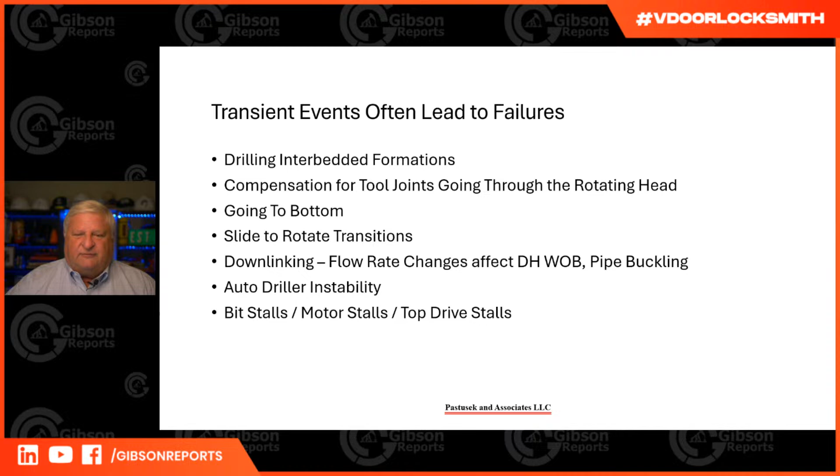So why do I care? Well, I need high weight. If I run high weight in the soft formation, I'll get high penetration per revolution. But then when I transition to the hard rock, I'm taking a very big, deep depth of cut, and I will break those cutters on the nose.

So if I run low weight in the soft formation, that's great—it slows down. But then when I get to the hard rock, the bit slows down even more, and I go into reverse whirl, because reverse whirl at the drill bit is a function of penetration per revolution. So that's not good. I don't like the first one because I break the cutters, and I don't like the second one because I start to vibrate.

So if I run high weight on bit in the hard formation and then drill off into the soft, I overload the cutters on either side of the nose. We'll show that here in a second.

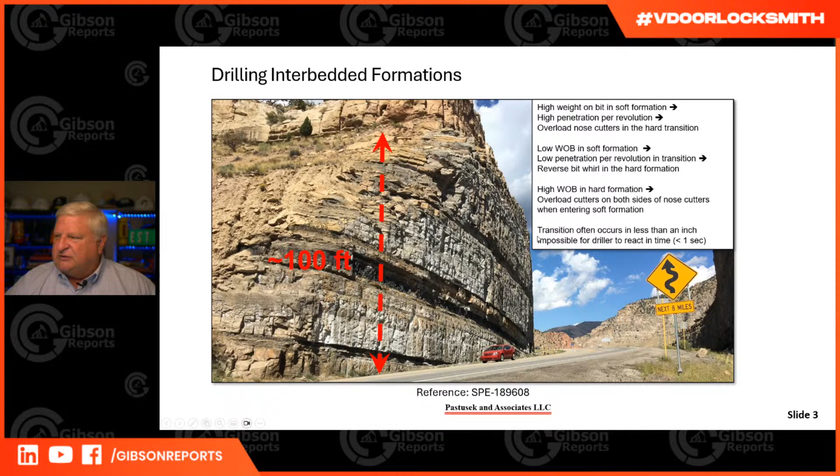So first off, you have to understand the problem. There's been a couple of papers—I put references down here for several SPE papers that you might want to read for follow-up.

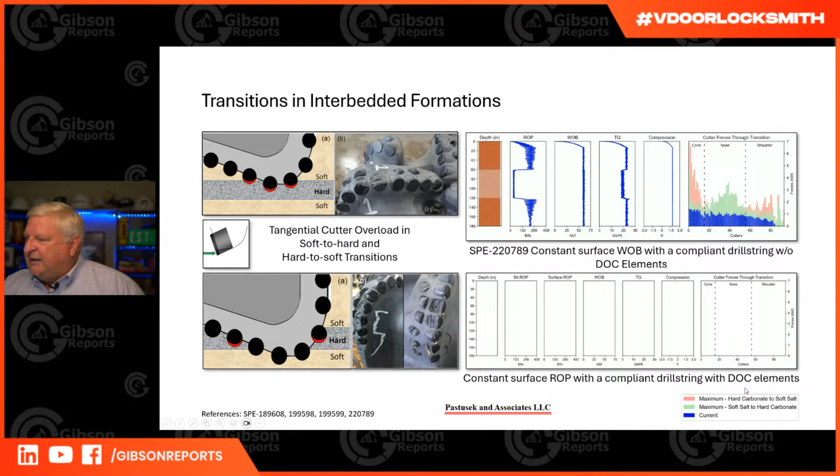What I'm going to do is, instead of running a constant weight on bit, I'm going to run a constant surface ROP. I still have a compliant drill string, so there is some string stretch that will change, and that makes it more difficult. In fact, what we're going to do is add depth of cut elements to the drill bit. We're going to put features on the drill bit to limit the maximum depth, because if it drills into hard rock... we'll go ahead and start this thing up.

Okay, so here we are. We're drilling along, and we're going to drill at a controlled ROP right here. Okay, you can see this ROP is slower than the other. That's important. I'm trying to control the ROP just when I need to, but I'm going to do so so that it doesn't overload those nose cutters.

Okay, so here are the loads. You see the load per cutter is quite low. Looks pretty good.

We're going to drill into our transition into the hard rock. Oh, look at there - that was the transition right there. Very little change. We didn't have this huge peak right here, right? Because we didn't approach it at a very high depth of cut.

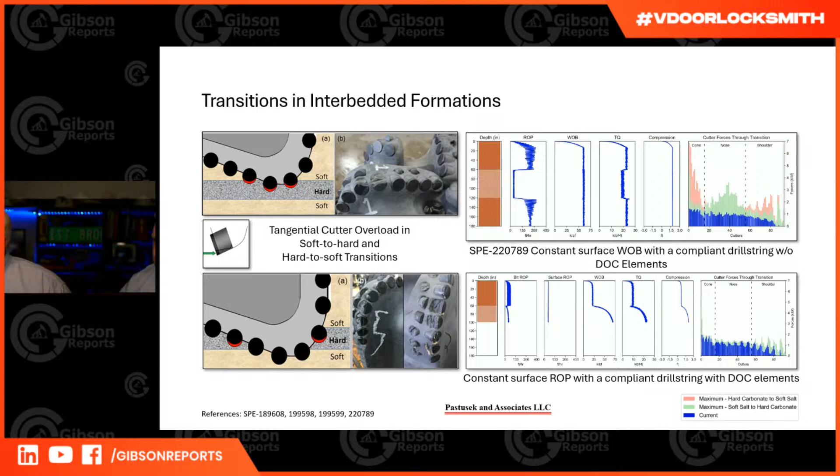Now, by the way, the other analogy that I like to use here is dipping a chip into your guacamole. I love guacamole. So guacamole is hard - it's hard enough to exceed the structural limits of the chips. You dip a chip in there, and you want to go maximum guacamole per chip right up to the structural limit. Same thing - we want the maximum penetration per revolution right up to the structural limit.

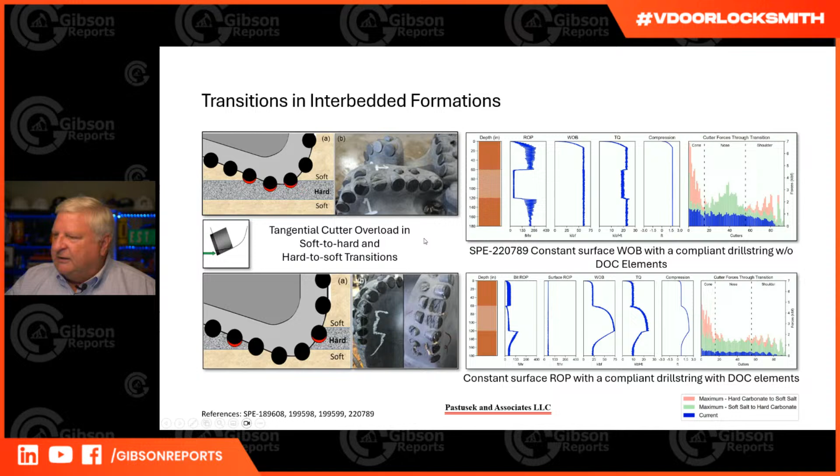But you can see here by running in ROP mode, I limit the overshoot of those little transient events right here by putting depth of cut elements on. So if you read the paper, you'll see there's every case with and without a compliant drill string, and with and without depth of cut elements. So it's a pretty complete paper, and well worth reading if you take a look.

Okay, transients - that's one again. You did have these two questions that didn't come up already. What about optimized ROP in a safe environment for the BHA?

So what you have to decide in terms of the best ROP to run depends on how hard the hardest streak is. Think about it: the soft stuff doesn't hurt anything. I don't have to worry about drilling through 5,000 to 7,000 psi. It's when I drill into a hard streak. If it's a 15,000 psi hard streak, I can take a bigger depth of cut, bigger penetration per revolution, than if it's 20,000 or 30,000. So I need to know something about those rocks.

Sometimes I don't actually have their strength. In unconventionals here in the US, we don't do logs for a lot of stuff. But then again, we've drilled 100,000 wells, so we actually have a pretty good idea where the hard streaks are.

What you have to look at is that hard streak: how hard is it, and did I break the bit last time? If I did, I'm going to back off the ROP when I enter. That's the deal. If I break the nose, I back off on the ROP when I enter. If I break down the outside, I back off on the ROP as I'm exiting.

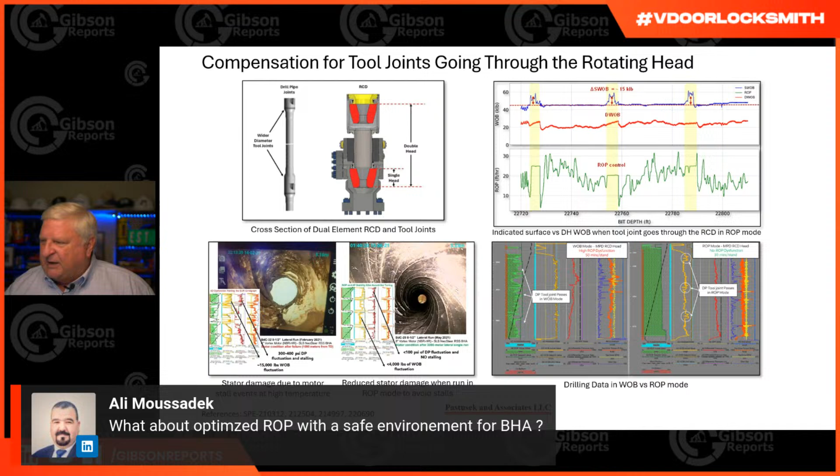Okay, what was the other question? It was just kind of a comment, about setting up real-time auto-detected founder point.

Oh yeah, so there's a lot to be said for what I'll call roadmaps. With roadmaps you do this work and say, here's my hard sections, here's the intervals of interest, and I need to set up a roadmap so I know what's coming. You can't do it like going down a mountain road—you can't get into the curve and then hit the brakes. You've got to hit the brakes a little ahead and anticipate that.

So that's what roadmaps are really good for, so you can figure out what your drill bit is capable of. All right, what was the last comment again? MSE real time with downhole parameters—it can.

If you've got downhole MSE, absolutely you can pick up a lot of this stuff. If you've got downhole MSE, you also have downhole torque and downhole weight, and you'll see those peak events. What I'll tell you is, I've got data with an in-bit sub showing that the peak torque at the drill bit goes up a little bit, but not by a factor of 3 or 7 like you'd see on surface, because I'm only loading one or two cutters. That's the value of doing the modeling—it gives you better insight into what's really getting exceeded when we exceed that structural limit.

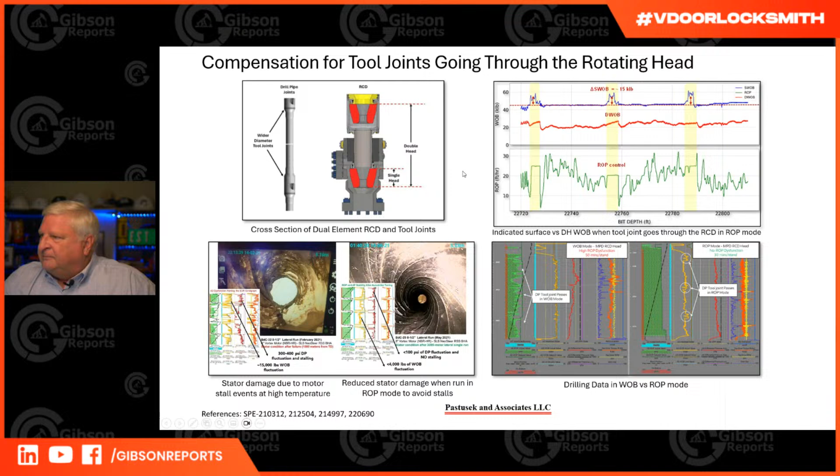If you look a little further - this is one of the more recent papers, 214997. What you see here is the tool joints indicated in blue, each one of these graphs. What I really want to point out is this is lateral vibration at the drill bit - a memory tool in the drill bit. And guess what you see? I hit a tool joint, and when I hit the tool joint, I get an increase in lateral vibration. In fact, watch this one - this tool joint right here, I more than doubled the vibration at the bit.

That's whirl, okay? Same thing - look at this tool joint right here, I more than doubled the vibration, and it's persistent. The tool joint only lasted a few seconds, but the vibration has a hysteresis to it. You start creating whirl, it stays in whirl, and it stays in whirl until you pull the bit. So from a bit whirl standpoint, again, I don't see this at the surface. I don't know whether it's whirling or not. I may, and I certainly don't understand it unless I look at this 1 second or faster data.

This is a similar deal with stick slip - this is RPM at the drill bit, and you see more stick slip, more stick slip, more stick slip, and here's the zoomed in version of that. What you see happening is that I've got those transitions - I'm adding or taking away 5,000 or 10,000 pounds of weight on bit, and then I add it all back in a square wave. So that's just exciting my stick slip, and I do that 3 times a stand.

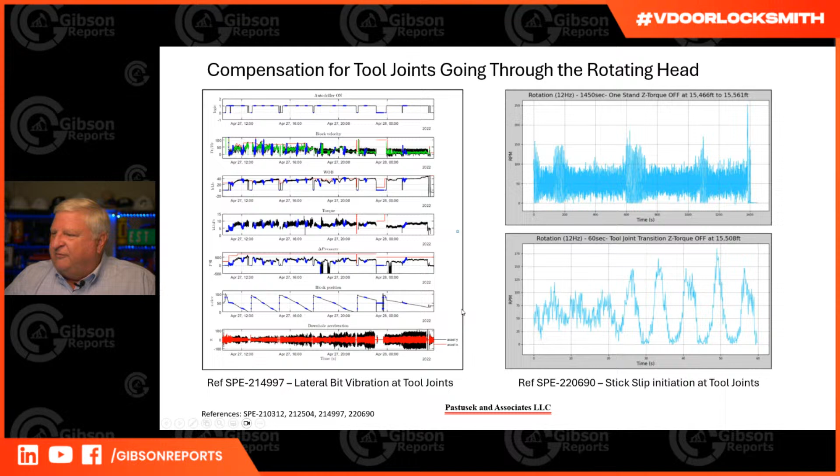So is this a problem for you or not? The only way I can tell you is go look at your 1 second data or faster. This downhole data was phenomenally insightful to understand what was going on, not just downhole, because this lateral vibration, we'd never pick it up at the surface. Even in the MWD tools, which might be 50 or 100 feet away, you may not see what was going on at the drill bit.

All right, I thought you were going to say this is a problem if you have tool joints. If you have tool joints, it is. If you have rotating heads, it is. If you don't have both of them, you're probably okay.

It just seems to be less of a problem. If you're drilling 200 or 300 foot an hour, it doesn't seem to be as bad the faster you go. I think you just got enough inertia, you just go right on through. But would that be the potential of having like an RCD that's kind of worn out?

Oh, you definitely see that. When I put a brand new RCD in, I've seen as much as 20,000 pounds to squirt the first one through, and then over time it gets to 10,000, and then it gets down to 7,000 and 5,000 because it wears out, obviously.

So how tight is the rubber element? And this is even without back pressure. If you add back pressure, if you're actually doing MPD, that's going to add additional loads because the tool joints are bigger, so there's more contact area around it.

So is that another way to tell if your RCD is going? You can, yeah, absolutely, you can tell it's wearing out. You can see the change in that step, and then you won't see that step anymore. It'll just be a drop off in ROP, unless you're running an ROP mode. If you're running ROP constant, then the weight on bit will go up, but it'll go up a little bit less.

So it could become a very good diagnostic.

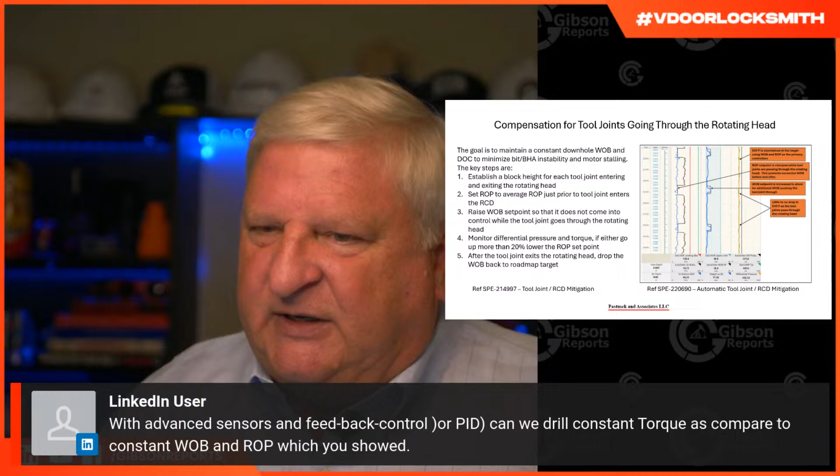Sorry, let's see, there was this one here. If a PDM is in the BHA, the differential pressure will tell.

Yes, absolutely. The differential pressure is a really good indicator of torque, without a doubt, and again, weight on bit as well. So the only thing about running in differential pressure mode, if I'm trying to do a PID control loop like the auto driller in differential pressure, the time delay on the signal is about 20 or 30 seconds. So differential pressure goes up downhole, 20 or 30 seconds later I see it at the surface, and then I respond to it. And by the time I respond to it, I'm already back into the next thing.

So it's very difficult to get an auto driller to be stable. No control system likes delays in the feedback. And the ROP has essentially zero delay. ROP is just drum speed. So, if I command it to do 120 feet an hour, the drum will rotate at some RPM to give you that exactly.

And it's millisecond kind of delay. So that's very stable. Weight on bit, it's a 5 or 10 second delay. Differential pressure is a 30-second delay. You know that when you turn the pumps on and flow comes straight up, it can take 20 or 30 seconds for the differential pressure to stabilize. So it's very difficult to control on those others. I use them more as a safety limit.

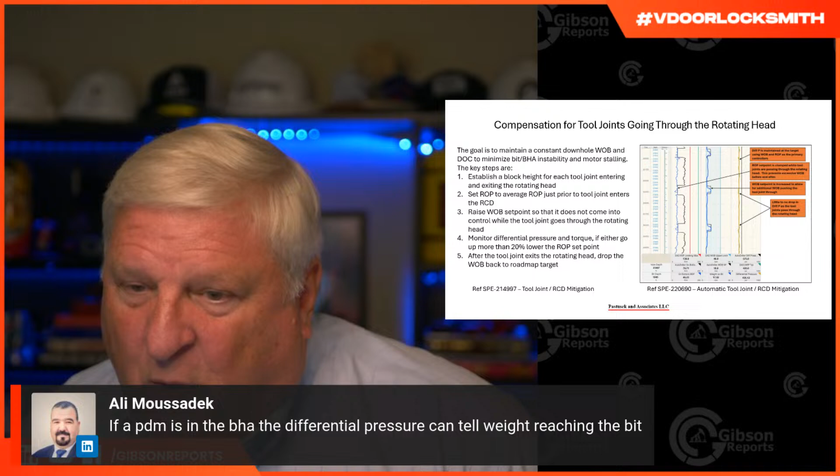Spring-loaded sub. There's all kinds of compliant elements in the BHA, and I used to think those would be great. Careful, I think you need to model that and see. The reason I say be careful: if I add extra compliance, and I'm in hard rock drilling at 60,000 pounds weight, and it drills off into soft rock, if I put a spring element there, when it drills off, the bit's going to squirt forward, and I'm going to overload those cutters even more.

So compliance, if you look at the paper I mentioned on modeling cutter loads, we modeled it without any drill string compliance. And man, in ROP mode it is beautiful, really, really good. Which is why the hint is that what I want to do is make the ROP of the drill bit close to constant. That's what depth of cut elements do for you, they keep you from exceeding those peaks.

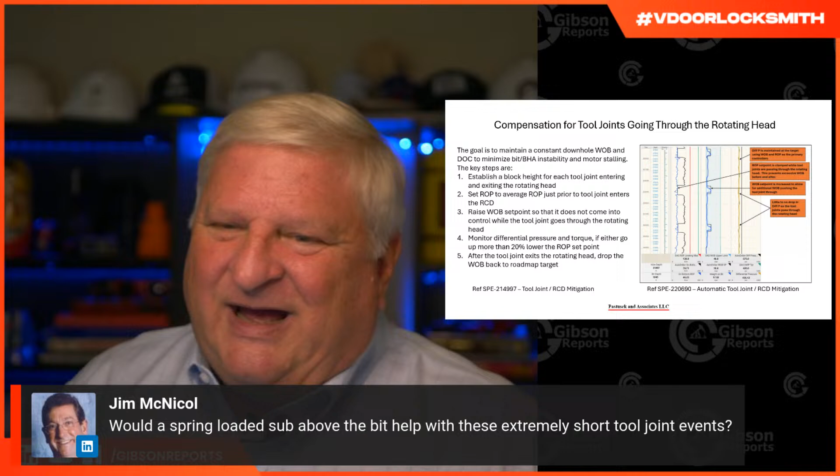No variations from tool joints when drilling with a Kelly and a rotary table. Robert, you probably remember when we ran rotary tables and Kellys, don't you? Yeah, that's true, those things. We weren't running RCDs, and as we started running RCDs, I think this is underappreciated.

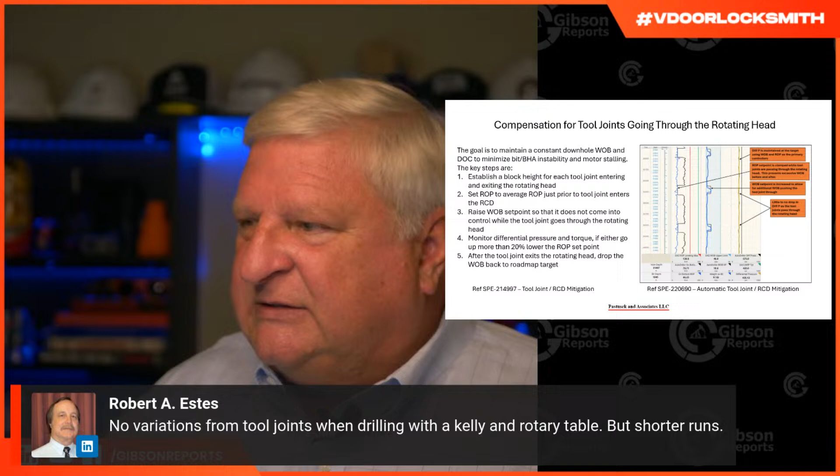I don't think people realize how much the loss in ROP and exciting all of these extra things, like I can excite stick slip three times per stand, I can excite bit whirl three times per stand, and they can persist to the end of the stand until I come off bottom. So it's not that the driller might say, oh I saw it and I responded in five seconds. A lot of the time they are very good, better than I would ever be doing that job, but the deal is that's too late. I've already done the damage, and that will just continue.

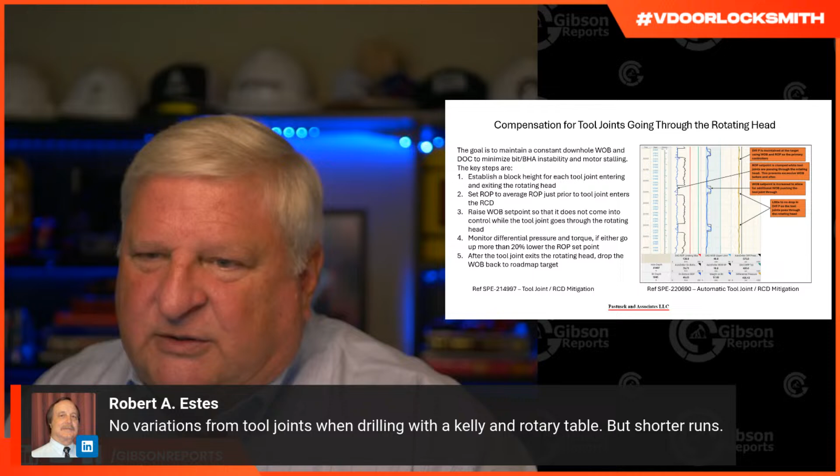Torque limiter is for pipe limits, and surface torque is higher than downhole. Yes, good point on the torque limits.

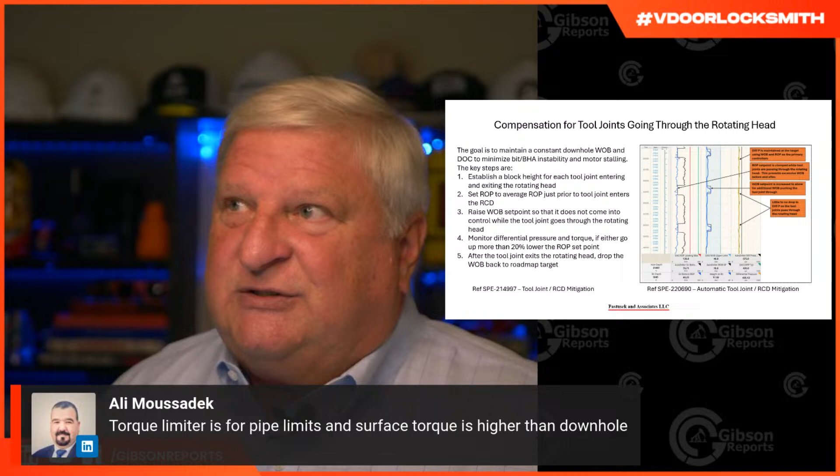If you drill off into something hard, I don't know if you even noticed when we were doing the animations, we drilled into hard stuff and the actual torque went down. Why? That's just harder rock. And you go, why did the torque go down in hard rock? That's because the ROP went down so much, so ROP goes down so much that the torque goes down with it. But it's still a step. And remember, transients, what I'm focusing on here is not just the steady state, but what's happening during the transients.

Robert asked if squirting tool joints through the rotating head causes variation in weight and torque also, which is more problematic. I think it's weight. I don't think a rotating head, which has a bearing on it, really changes things, there's no torque drag to speak of, if that's the question you're asking.

Now, when I change the weight on bit by 10,000 pounds, I will change the torque at the drill bit a lot. By the way, if I'm already running buckling, which in most cases, these long laterals, we run buckled all the time, but now I squirt in and put an extra 10 or 15,000 pounds on top of it. Once you buckle the drill string, it has hysteresis too, it doesn't immediately unbuckle just when you take that weight off. Once you buckle, you guys have done that, you buckle a long slender rod and take the weight off a little bit, it's still buckled, it didn't quit, right? So again, these things are really important to us.

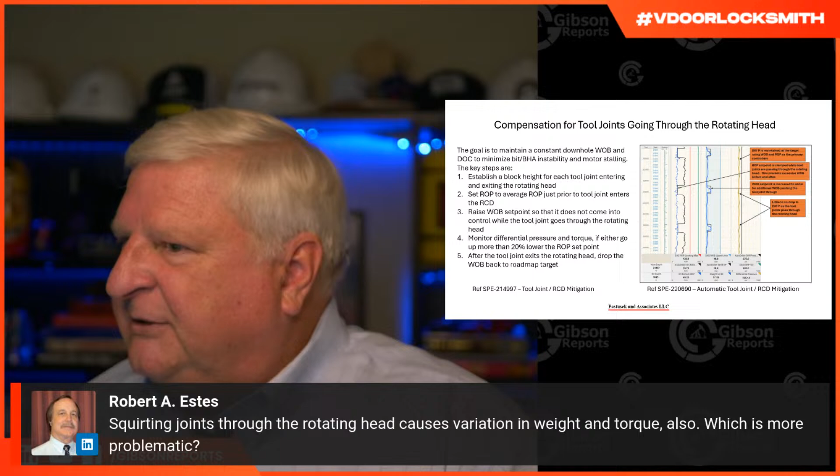So you want to jump back into the presentation? Yeah, we'll start some of these. Okay, start, yeah, we'll come back. We'll come back. So I do want to show...

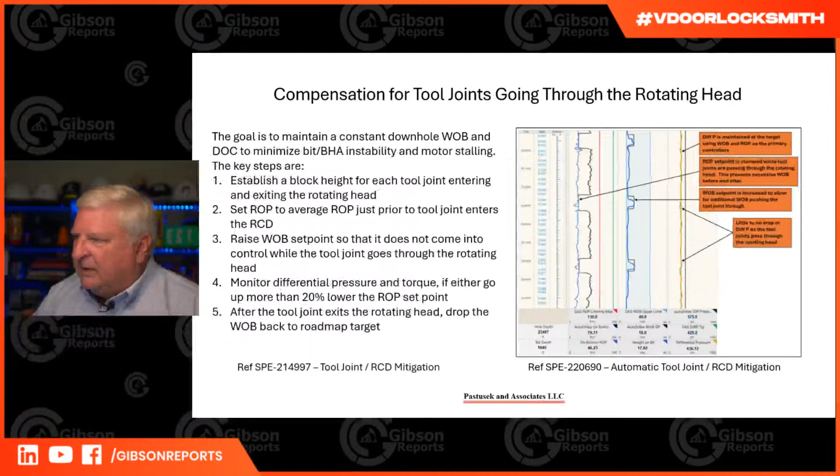We wrote this up when I was at ExxonMobil. Several of us said, 'Hey, what are we going to do?' And the answer was, 'We see the tool joints going through the rotating head. We will give instructions and training to the drillers to run in ROP mode, and we'll set the ROP at whatever average ROP had been. So if we're drilling 57 feet an hour, we'll set it for 57 feet an hour, and we'll raise the weight on bit, the surface weight on bit set point, up out of the way.'

So you look at this graph here, here's an example of doing that. Here's the set point in black, the surface weight on bit set point, you raise it up out of the way. Here's the tool joint going through and then coming back. You've got plenty of time, you can do this two or three feet ahead because there's a variation in pipe length. You don't know exactly where the tool joint is going to come, but you can raise that weight on bit set point up as long as the first thing you do is set the ROP.

So we did that, and we did it manually for quite some time. My unofficial count was that the drillers caught about two-thirds, and about one-third of the tool joints got through anyway. And again, I don't want anybody to give any grief to drillers.

They've got way more important things to do than the little trivial things we give them. However, if I could automate it, that seems like a really good idea to automate. So we challenged several vendors to do so.

One of them is in this paper right here that did this, in fact. They were doing tool joint compensation before. They followed the procedure that we had written up and put in the SPE paper that Exxon followed, which I like even better. You'll see that if you look at this paper, just presented.

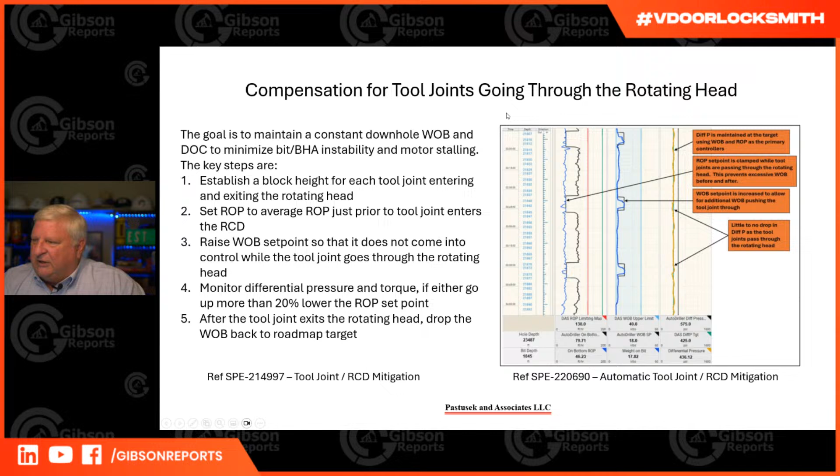Okay, so take a look. I think I have not run a rig with this automation system on it yet, but I've looked at a lot of their data, and I like it. I think it's the right thing to do. And I do know there's other vendors, other drilling contractors trying to do this as well, because I challenged several of them to do so. So anyway, automation, that's pretty cool.

Let's talk about going to bottom. Here's a great example, a recent paper about going to bottom. This is time across the bottom axis, about 2 or 3 minutes across. This is the manual process of going to bottom. We start at different heights, go at different rates, then do a pause, then go down, and we got to kind of everything.

We do fast connections and slow connections. The value of automation is I pick up until the breakover. So here I am, this is what my block height was, and there's some variation there, but you look at the slope down and the consistency here. Automating this going-to-bottom practice doesn't mean it's going to be better, but because it's consistent, I can look at what's going on downhole. I can look at what's happening in the surface data, and I can then fine-tune it much, much better.

This process that's not in control, even if you give me an instruction—a good friend at Exxon said, I said, well, here's our procedure for going to bottom. And he said, how do you know they're following that? I said, well, because when I'm on the rig, that's what they do. And he said, when you're not on the rig, what do they do? And I said, well, I don't really know.

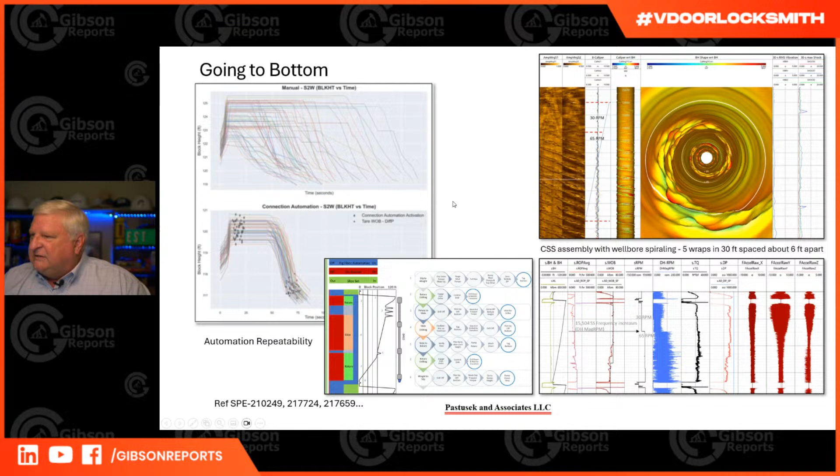So the big deal is, how do you control that? It's your going-to-bottom practices. How fast do you rotate off bottom? Which I'm counting as part of going to bottom. How much time do I spend there, etc. So again, I need to segment the times into small blocks so they're similar kinds of events.

I can't remember who the quote came from, but one comment was: if you can create a mathematical model of something that mimics the real data you get, it gives you a deeper understanding. It lets you know you actually understand something. So I showed you a model of the auto driller that was based on some guesses about how the auto driller worked, until I fine-tuned it enough that it matched the actual data we got.

Here's an example from the slide-to-rotate transition. We have an open source model. Anybody who's not part of the open source drilling community, look up OSDC - Roman Shor at Texas A&M is currently the host for that. Greg Payette, Roman, and I started this effort for the open source drilling community, and he's got a couple of models in there now, always looking for more models and more validation data.

This is the ExxonMobil model that was donated. You've got a downhole motor here, and then you've got some drill collars and some more drill collars and drill pipe, and it comes all the way to the surface. So it's a lumped spring-mass kind of thing with power being input at the motor right here. Let's just watch what happens.

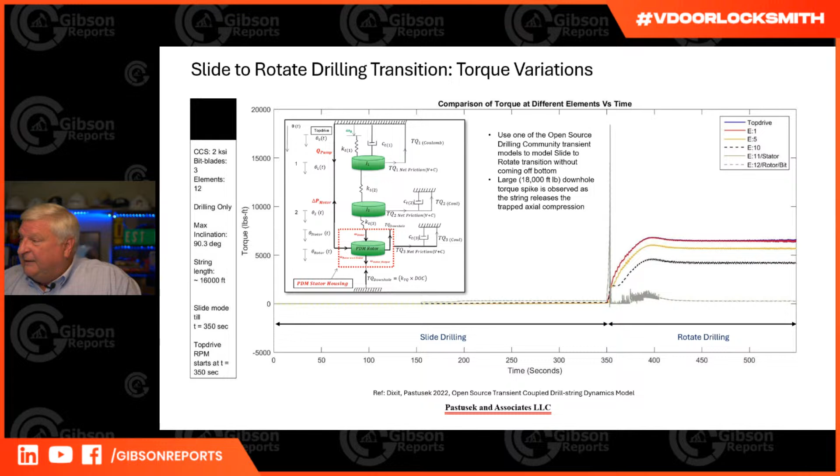It's very likely related to one of these stall events where the bit has stalled and the motor has enough power, it just winds up the drill string. But if I was in slide mode, I've got a bend in my motor and a curvature in the hole. So I'm now backing it off, and I've kind of anchored that drill bit in the bearing housing. I've anchored that in the rock. So I'm unscrewing everything below the stator. Positive torque above the stator, negative torque below. And again, how do we fix those kind of things?

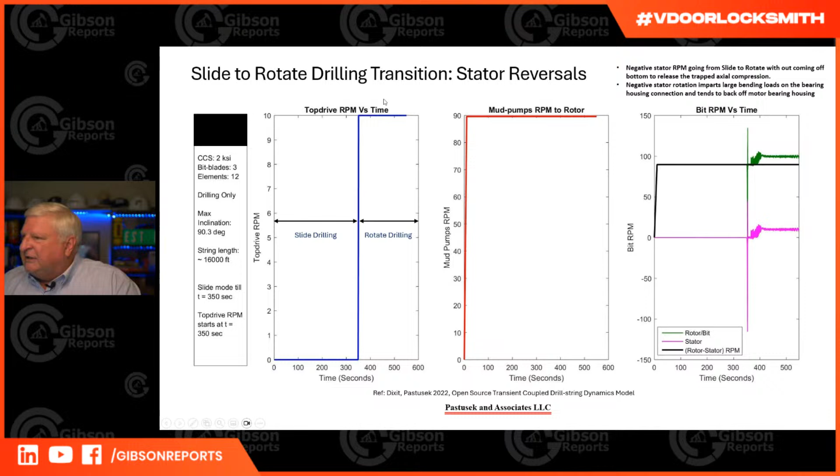Pay attention to the connection practices and the slide to rotate transitions. All right, simple things. We downlink all the time, right? Every time you change, in order to downlink, I usually change the flow rate. Yes, I can do a downlink with RPM, but most of the time we do a flow rate change.

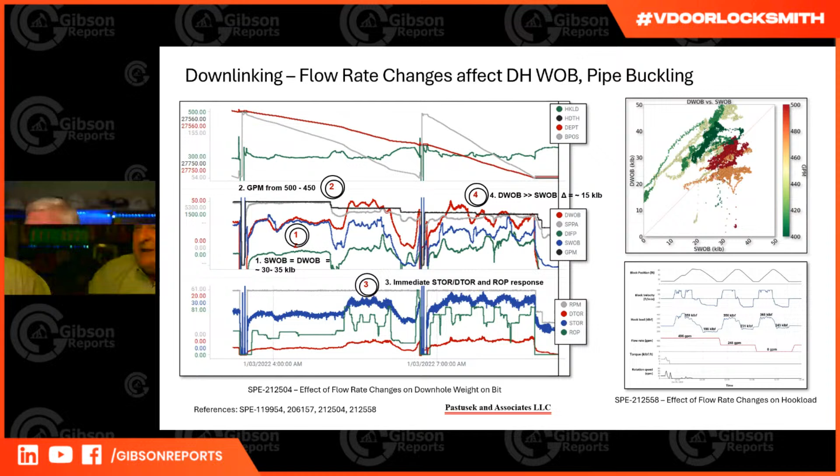Do I need all these downhole gauges? It'd be nice to have them, but if I understand the physics, I don't have to. I can just control that before I change the downlink.

Okay, if you look at this, this is weight on bit when I'm on bottom. If you just look at hook load off bottom, look at these. This is great. So here we are, we're off bottom, and this is block speed. So here we are right here coming off bottom, and look at here, I can't read the number, 400 and something GPM, 496 GPM. Yeah, good round number, 496. We drop it to 248, and then we drop it to 0. And look what happened. At 496, my hook load was 198,000 pounds.

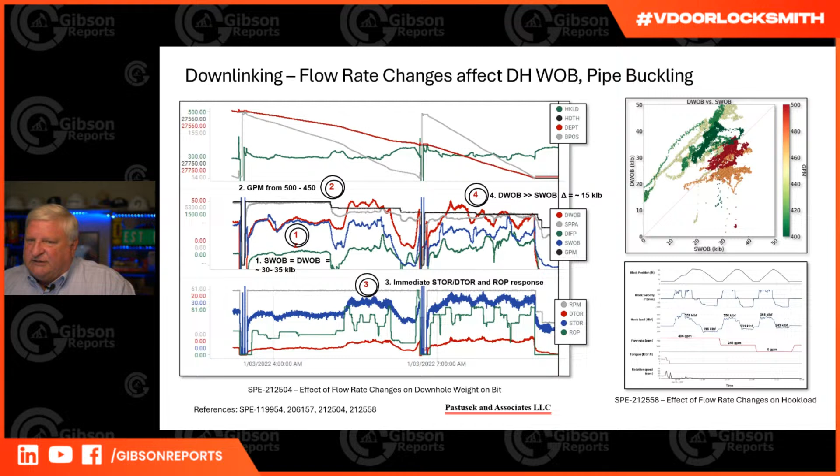I dropped it to 248, it's 221. I drop it to 0 and it's 243. So that's about a 45,000 pound change in hook load just by the flow. That's important. It's important for pipe buckling because I'm at full flow. I'm zeroing the quote weight on bit off bottom, but I have 45,000 pounds of pipe compression that I hadn't accounted for. So it's important in buckling. It's important when I do downlinks and I change the flow, or even if I'm in the middle of a stand and I change the flow. So all those things come into play.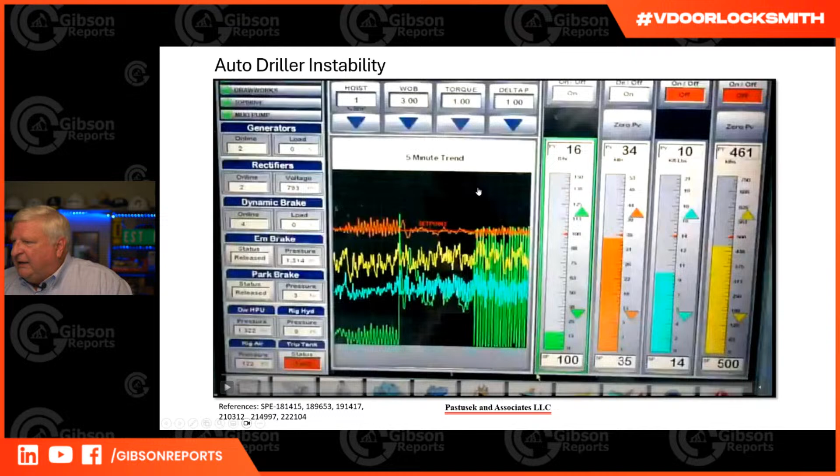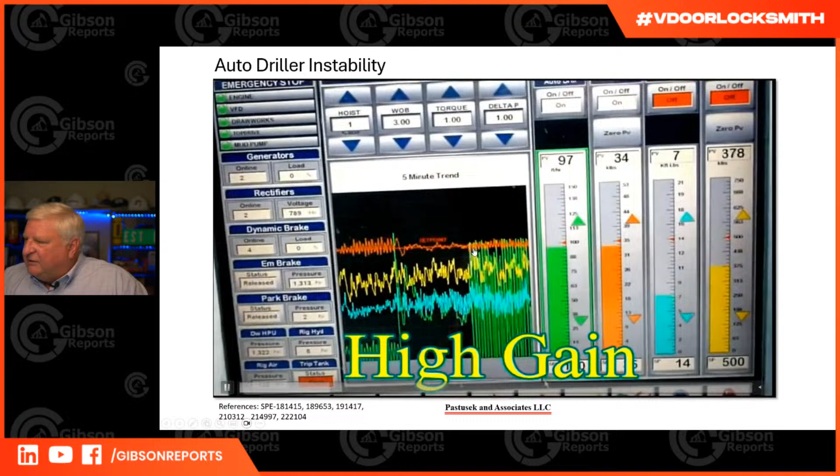My other favorite one. So here's an auto driller. This is a 5-minute window. We're gonna look, and green is... We'll go ahead and play the video here. So this is a screenshot, a rig I was on in Arkansas. It's in the SPE paper, this first one. You see the ROP is going 0 to 100, 0 to 100, right? If you look at the drum, even if you don't have digital data, you just look at the drum. Start, stop, start, stop, right?

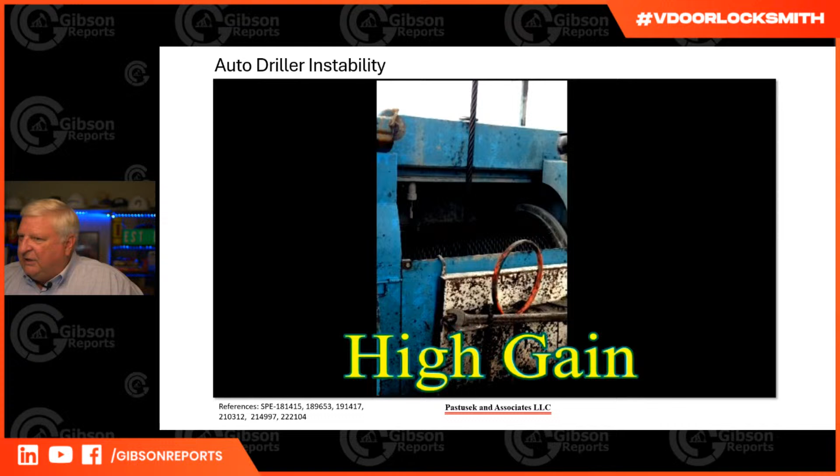I've been on many rigs in Oklahoma with the old band brakes, and you hear them squeak and then stop, and then squeak and stop. You can hear that miles away. That's not what you want.

If I just change the gain on the auto driller so that I don't overshoot off and on, I get a much more steady let off of the drum. That's what I want.

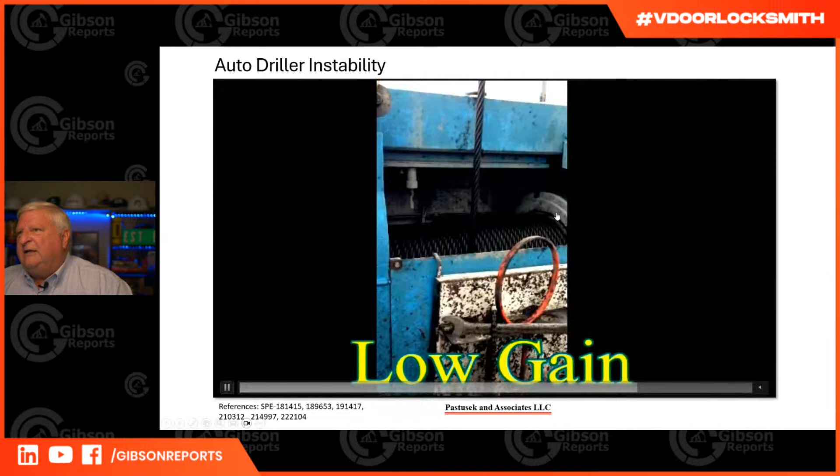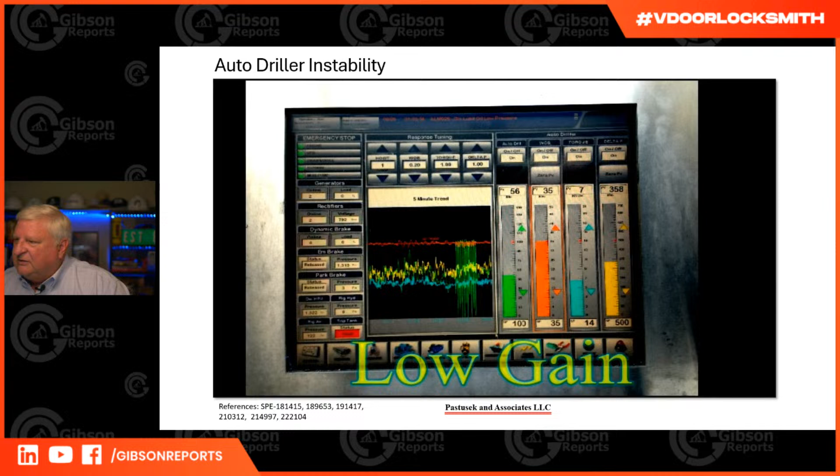Why do I care? You're thinking, doesn't it all get absorbed downhole? It does. If I have very high ROPs at the surface, I'm buckling the drill pipe, and I'm putting torque spikes into the drill string so I can excite stick slip from the auto driller.

How fast? This is changing the gain over a 5-minute window. We were going along, things were reasonably stable. We raised the gain, and literally in a matter of seconds, you see it paints the screen. Then we lower the gain, and in a matter of seconds, it goes away.

So if you're on a rig and you have access to the gain settings, this is response tuning. This happens to be, I think, an Omron controller, but some systems you can control the gains, others you cannot. I've been pushing the industry, particularly for those that can't control the gains, for automatic gain control—a scheduler that looks for instability, lowers the gain when that happens, and raises it otherwise. There's a paper on that as well.

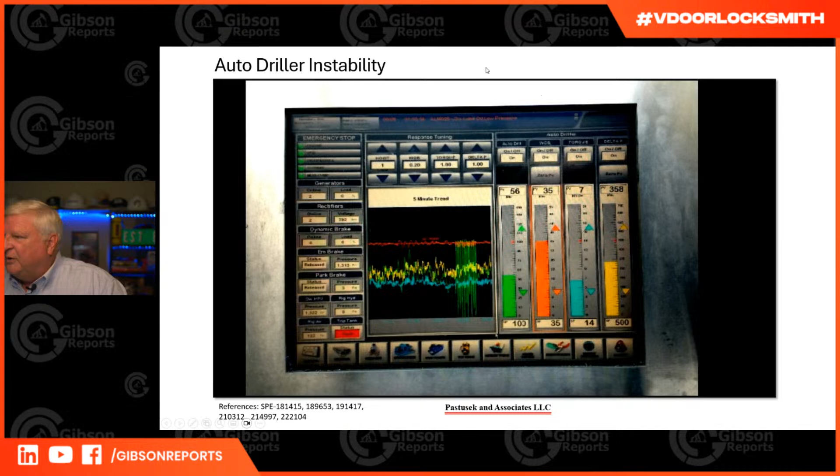So this is just, do we understand what's going on here? You can do anything with Excel, almost. This is an Excel spreadsheet simulating it. You made this in Excel? This is Excel, yeah. Of all the things you've done today, this is the one I'm most impressed with.

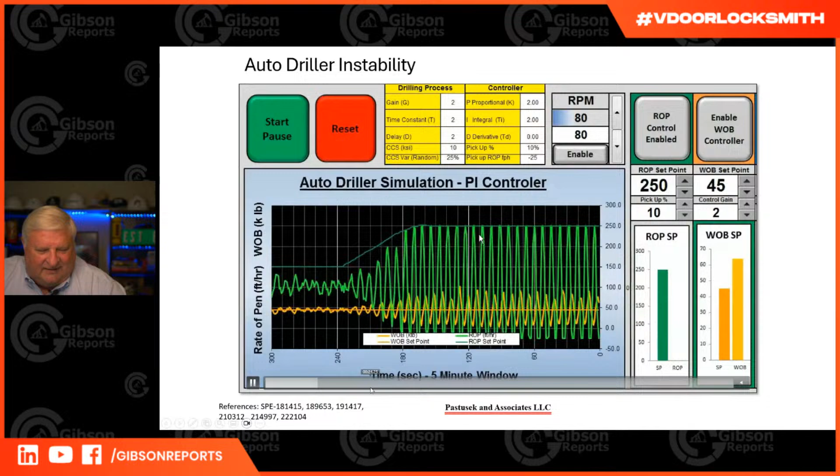Good gosh. Well, you go with what you know, right? And so I haven't programmed in Python and R yet. I still need to learn that.

But what you see, I'm painting the screen right here—this is ROP, I just raised the gain. You see this right here? Let me go back as I was talking. So yeah, gain of 2 is a dimensionless number, but a gain of 2 here is a high gain, and I'm overshooting, undershooting, overshooting.

I'm sitting here, right here. We're going to lower the gain, lower it down to 0.5. Immediately, things settle out. Now, in the background, I've got drilling rock that has about a 10% variation in rock strength. And there we are.

We raise the gain back up, and you see here, again that's a 5 minute window. So within less than a minute, I'm at full instability again—I'm hitting my limits.

Now, here's what's cool: change the ROP set point—this is the top green line right here. It makes sense that I would clip the peaks, but watch what else happens.

As I change the ROP set point on this particular auto driller, it takes smaller steps. That's because the way it determines step size, it looks at the ROP set point. If your weight's off by 10%, it will take 10% of the ROP, because it's really controlling drum speed—when it's all said and done, it's going to control the drum speed, and it'll lower the drum speed by 10%.

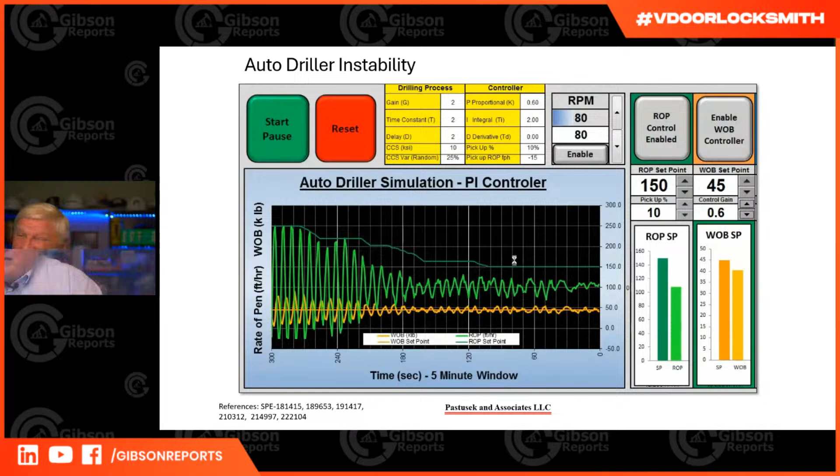If I'm drilling at 300 foot an hour and I have the ROP set point for 300, everything's fine. If I'm drilling at 10 foot an hour, like a hard streak, and I still leave that at 300 foot an hour, I'm taking 10% of 300—I'm taking 30. I go to 30, then I overshoot, go to 0, then go to 30, and back and forth.

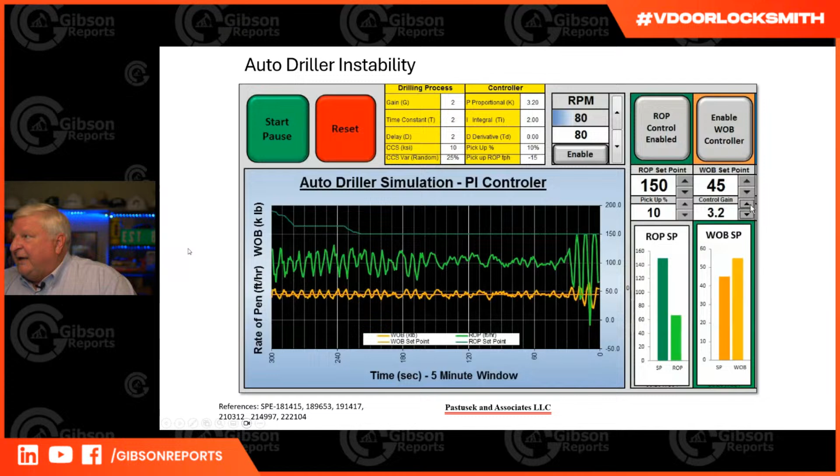So anyway, there's room for both of these. Is this a problem or not? Tell you what—if you're painting the screen with ROP, with differential pressure, if you're painting the screen with torque, and if it's torque with no ROP changes, then it's likely just stick slip. But if you see ROP changes as well, go look at the auto driller and figure out how to tune it up, and engage some of the smart auto driller guys working in that area.

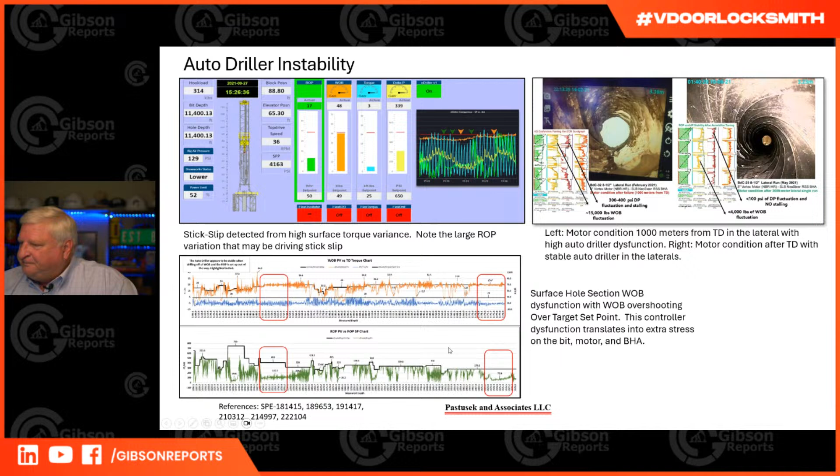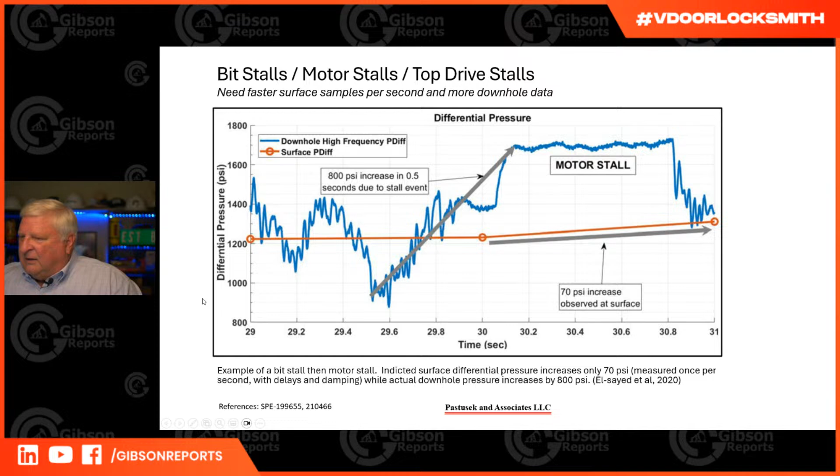So don't be surprised if you start seeing bigger files show up on your desk. That's kind of what has to happen. In fact, relative to that, a couple of things.

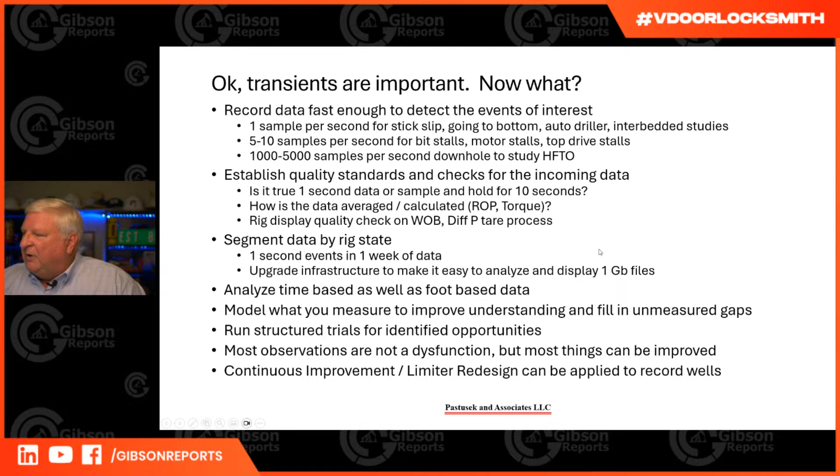So, okay, I've done my talking.

Well, we'll leave this over to the side. All right, I'll remove that one. And I'm going to turn this light on, because when we did the 2-camera shot, it came in. The color was pretty far off. All right, so make sure that my audio is working.

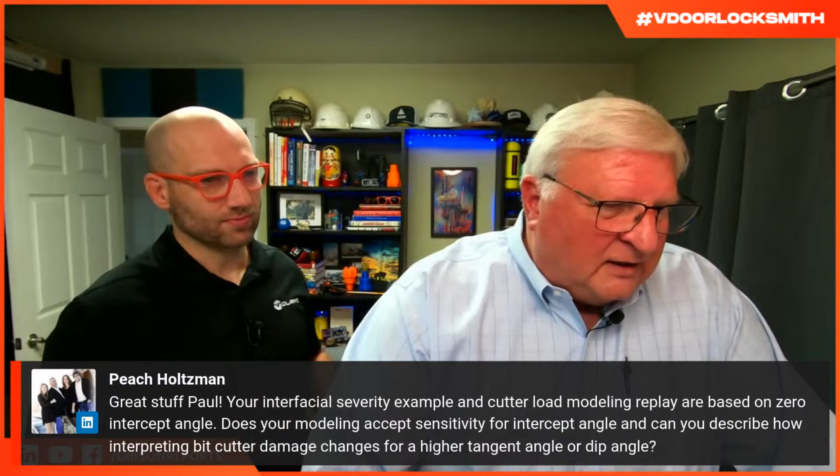Peach, your comment here about load modeling. Yes, we did model that at zero. There has been some work, I know some work at Baker Hughes on modeling interfacial severity at an angle. And of course, yes, it'll overload. Instead of overloading the nose, it'll overload those cutters at 45, a 45-degree dip or whatever. It still does the overload though. It's still bad, you won't like the result.

So what I would say, but yeah, it can be a lot more complicated than we showed. Transient, we talked about that one. Oh yeah, oops, that's all right, that's fine. Running scripts on large data.

Do you think AI could be used real time? Oh man, yeah, I think AI could help be a real time assistant, but only for the things that you've really already studied, because boy, we talk about AI being... it can just make things up. It hallucinates.

And I did ask AI to give me a set of references or things to do on avoiding stick slip, and I use this as a great example. I said give me references, so it did, and it gave me a whole bunch of papers. And one of the papers was mine. I thought, hey, that's pretty cool. I read that, and I don't remember writing that paper. And that's pretty bad, because you're thinking, oh man, I'm really getting old, I don't even remember what I wrote. So I looked it up, and no, I did not write that paper. And then I said, maybe I just gave a talk at an industry event. So I went back through all my notes of talks and things that I'd done, and I hadn't done that either. And I came to the conclusion that the AI made up that reference.